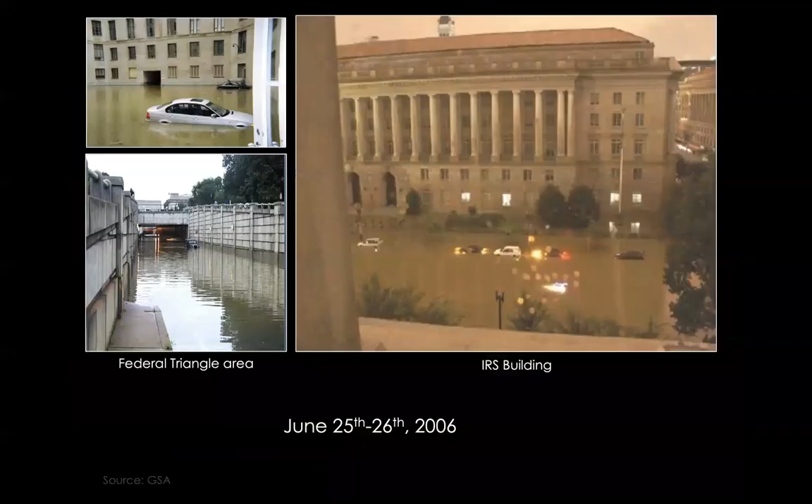The National Mall, one of our most iconic landscapes and public spaces, is threatened by devastating flooding. This reconstruction shows how floodwaters in 2006 inundated Constitution Avenue, the National Archives, Smithsonian museums, and more.

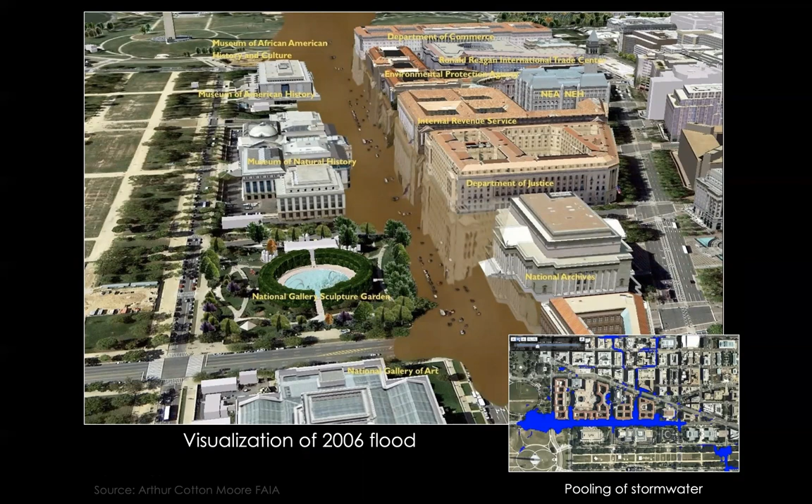This was hardly the first time the mall area had been flooded. Floods did extensive damage in 1889, 1936, 1985, and as recently as July 2019, when a month's worth of rain fell in less than an hour, overwhelming storm sewers, flooding the National Archives' new visitor center and the White House basement.

Flooded walkways around the tidal basin are a regular occurrence. 14 years after the 2006 flood, with a host of studies confirming the threat from agencies like DC Water, the National Park Service, and FEMA, there's still no agreement on what to do.

Recent efforts by an intergovernmental flood response team, the DC Silver Jackets, have been unable to bring the relevant federal and DC entities to agreement on a solution. The biggest impediment, and pretty much everyone agrees on this, is the plethora of entities involved in mall governance. These include the Park Service, Smithsonian, plus DC and federal review agencies. No one entity has the jurisdiction or responsibility, or importantly, the funding, to tackle flooding.

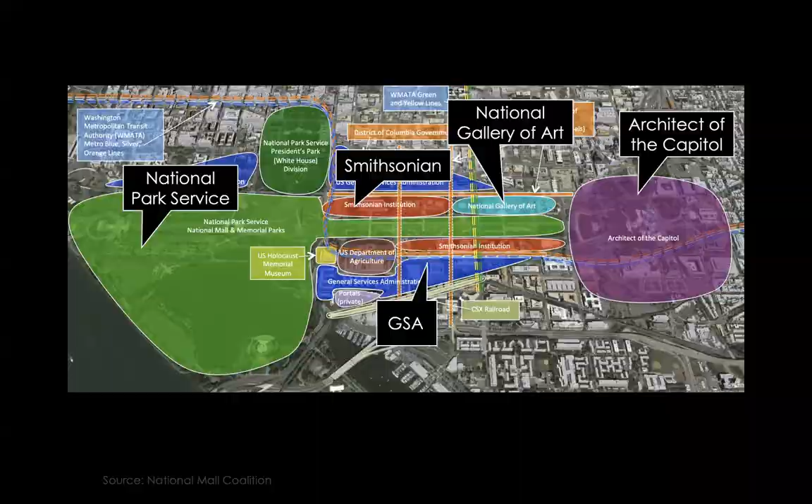We want to show you what we think is an important contribution to solving the stormwater flooding crisis: the National Mall Coalition's National Mall Underground. Architect and Coalition Vice Chair Arthur Moore has been designing the concept since 2013. We've refined it in dozens of meetings with DC and federal agencies and civic groups. Both the Army Corps of Engineers and the Silver Jackets have reviewed it.

What is it? The underground is a multi-purpose stormwater reservoir, mall visitor center, tour bus parking, and geothermal energy facility. The basic box, a large stormwater reservoir, can be constructed beneath the mall's grassy panels between the Smithsonian Castle and the Natural History Museum. The underground can collect 28 to 30 million gallons of floodwater, the volume of a flood like the one in 2006.

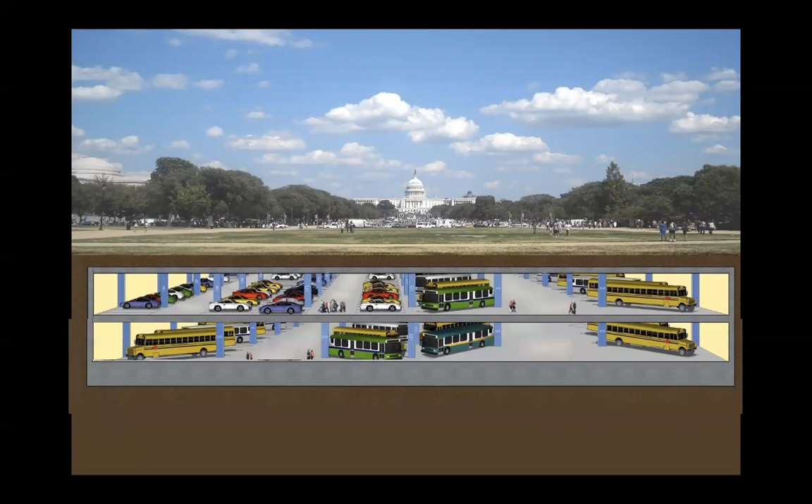When not needed to collect stormwater, the lower floodable level will be a parking garage for tour buses. The upper level, not to be flooded, will contain car and bus parking, plus rest facilities for bus drivers and a mall welcome center with restrooms and food service.

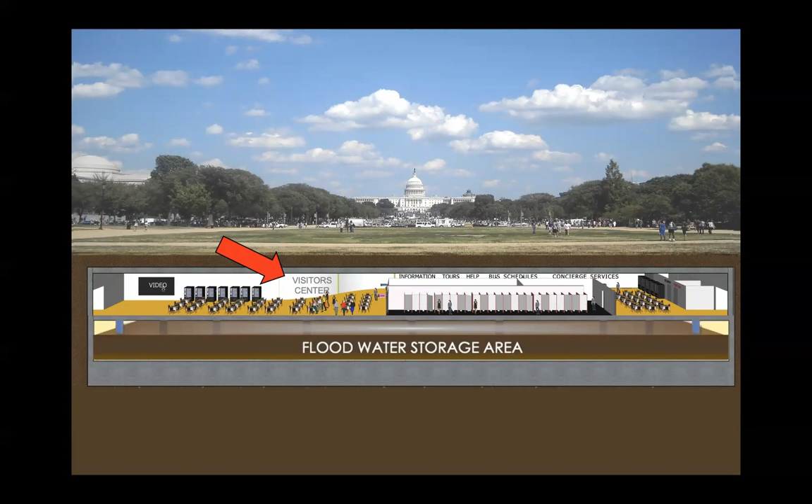At one end, a small cistern can collect rainwater. At the other end, another cistern can hold groundwater pumped from beneath mall area buildings. This water can be used for irrigation of grass, trees, and gardens.

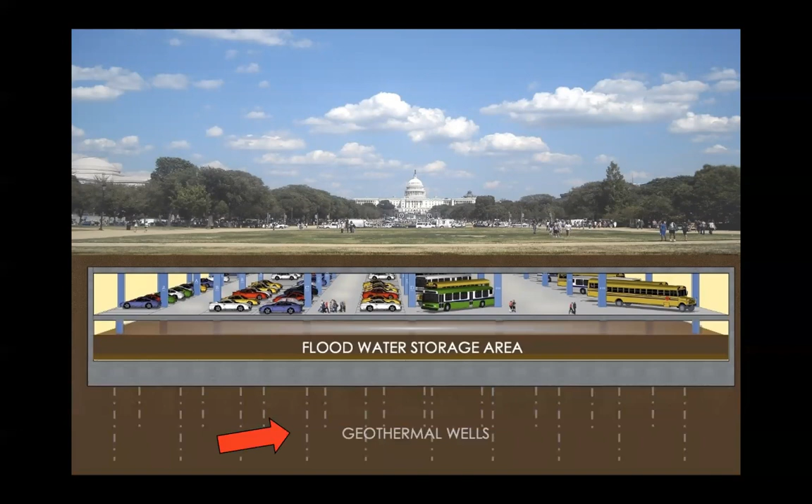Geothermal wells beneath the structure were added to the concept in 2014 at the suggestion of then GSA Administrator Dan Tangherlini. These will provide 3,000 tons of cooling per hour, enough clean energy to power not only one, but several Smithsonian museums and other public buildings.

Vehicles may access the underground via the existing ramp from Independence Avenue to the 12th Street Tunnel, via a ramp between the Arts and Industries Building and the Hirshhorn, or through the 9th Street Tunnel. Cost estimates for the underground range between 260 and 320 million. That's a lot of money, but we have a plan. We'll get to that.

The Beneath the Mall Stormwater Reservoir is not the Coalition's idea. It was one of four solutions found viable in the 2011 Federal Triangle Stormwater Drainage Study. That report, commissioned after the 2006 flood, was a collaboration among 14 federal and district agencies, but the cost of the reservoir, $400 million, was deemed prohibitive.

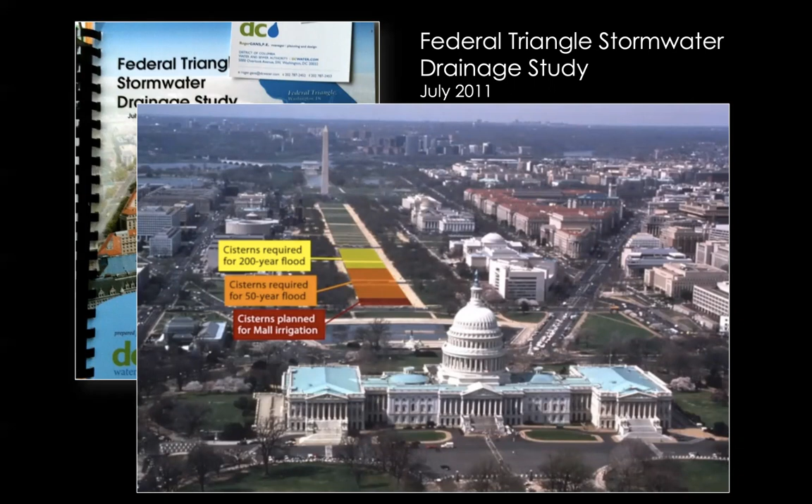The Coalition's idea was to take the empty box beneath the mall that would sit unused most of the time and turn it into an active, visitor-friendly facility that will generate revenue year-round. Intrigued, the DC Council in 2017 passed a unanimous resolution asking the U.S. Army Corps of Engineers to study its feasibility. In September 2018, the Corps found that flood risk from a storm of the intensity that flooded the Federal Triangle area in 2006 could be reduced significantly during a flood event by implementation of the underground. Also, revenue potential from parking fees and water credits may offer self-financing opportunities that attract a public-private partnership.

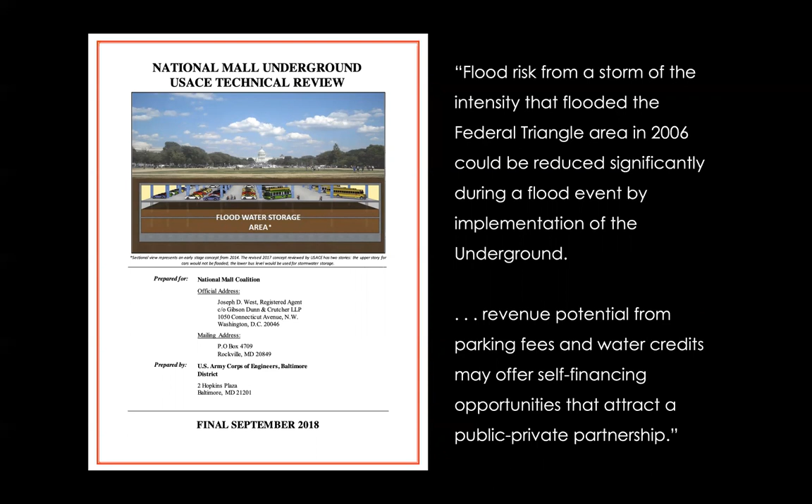Also in September 2018, Arthur Moore and I were invited to present the underground concept to DC and federal agencies and local universities of the DC Silver Jackets team. Clearly, there is interest in the concept among mall stakeholders. However, the Park Service opposes it because it does not conform to its own 2010 National Mall Plan.

Now I'd like to anticipate some questions you may have. First, aren't there alternatives that don't require digging up the mall? Let's start with some basic flood history. It's important to understand that DC has three different types of flooding. These slides come from a 2018 presentation by the National Capital Planning Commission.

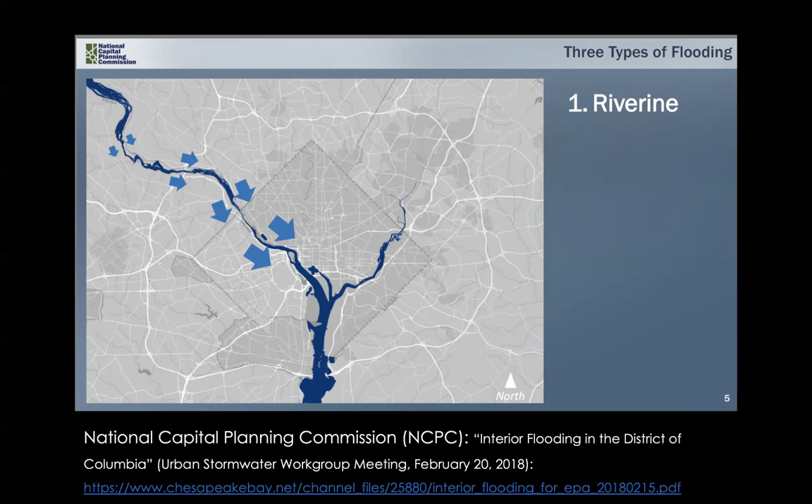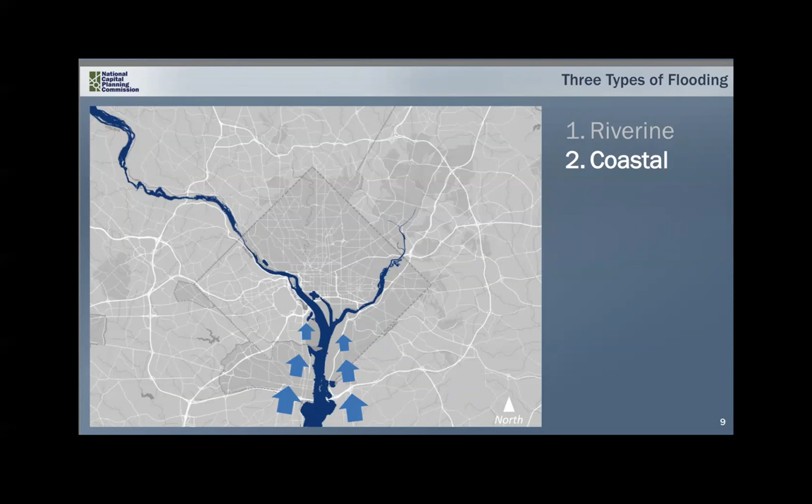Riverine flooding happens during and after heavy rains as the Potomac overflows its banks. It happened in 1889, several times in the 20th century, and is common at Washington Harbor and Georgetown. Coastal flooding, or tidal flooding, happens when tides and storm surges push the Potomac northward. The submerged walkways around the Jefferson Memorial result from tidal flooding.

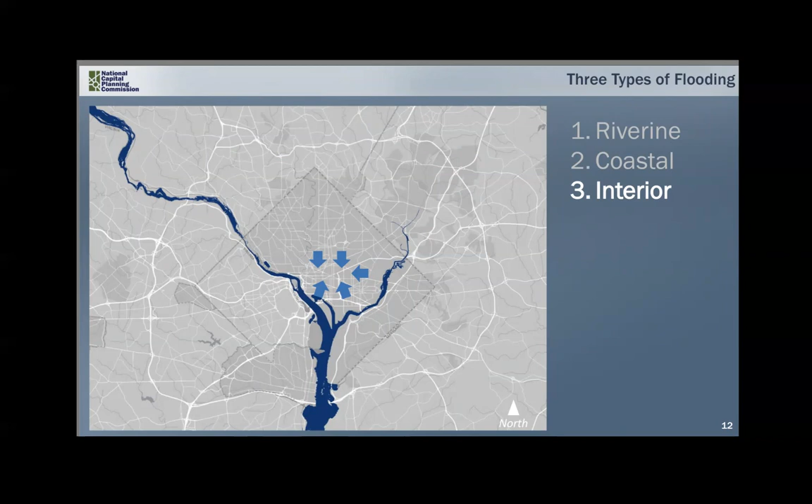Interior flooding has nothing to do with the rivers. It happens when heavy rains overwhelm the storm drains, inundating streets and buildings. This is what happened in 2006, destroying the National Archives' newly opened visitor center, closing museums and government buildings, and causing tens of millions of dollars in damage.

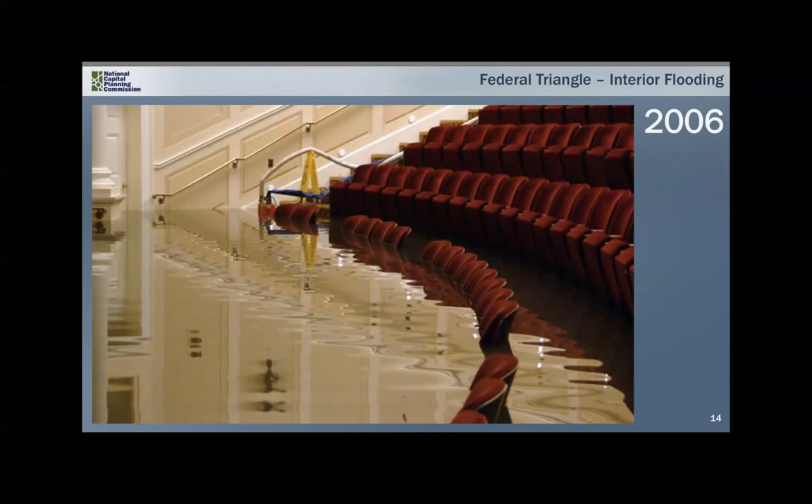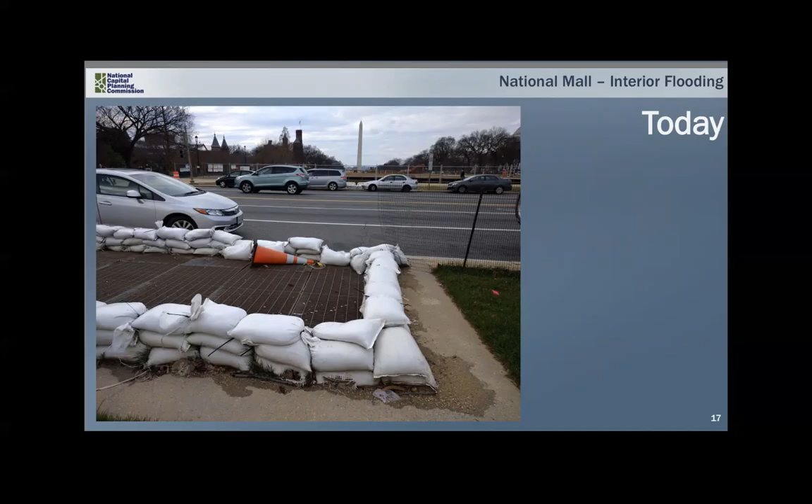Since then, stopgap measures like sandbags have been used to protect underground metro stations. While some corrective actions are being taken to address riverine and tidal flooding, none of these will protect the mall from interior flooding. The 2019 Silver Jackets report on interior flooding in the mall area concluded that of all the potential solutions studied, only two are viable.

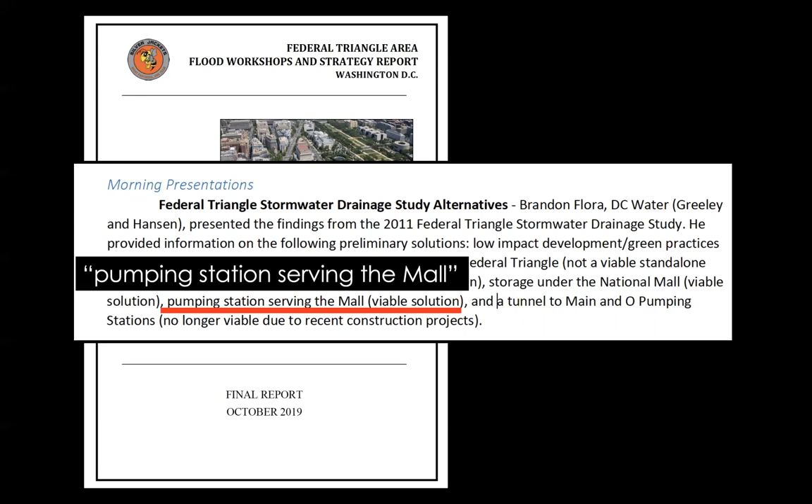One is to build a new pumping station to pump floodwaters into the tidal basin. But what if DC gets heavy rains that cause both interior flooding and riverine flooding? Where would the water be pumped? The only other viable solution, according to the report, is stormwater storage under the mall.

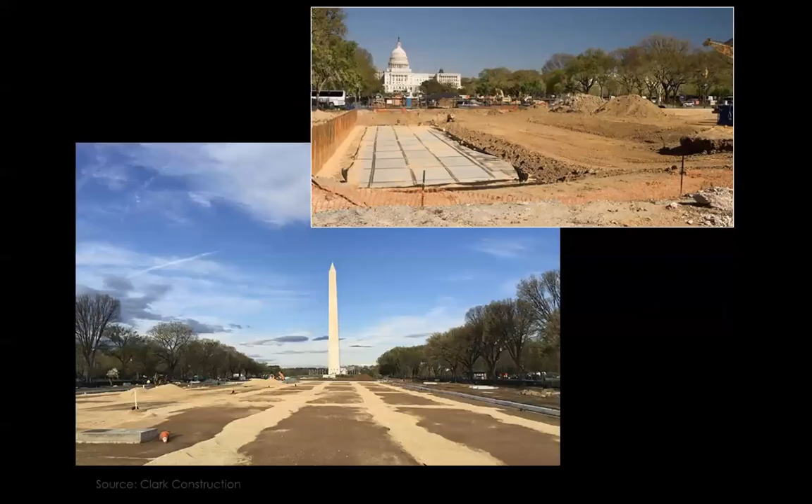Construction will cause inconvenience. It will close off a three-block area between 9th and 12th Street for about two years. But the Park Service's turf grass renewal project also closed off large swaths of the mall for two years, from 2014 to 2016, and visitors seemed to adapt in anticipation of the beautiful carpet of green. We believe visitors also will forgive the underground's short-term effects once they can experience its benefits.

Second, won't the underground increase traffic and congestion? We think not. Tourist destinations around the world, for example at Amsterdam's Museumplein Park, and close to home, Washington's National Cathedral, use underground parking to get cars and buses off the streets while supporting tourism and its economic benefits. The truth is, DC and federal agencies have for years been searching for ways to get buses off city streets.

It's not just traffic congestion, it's also public health. The American Lung Association's 2019 State of the Air report gives DC an F for ozone, associated with high rates of childhood asthma. Buses parked underground will be off the streets with their engines off. The Metropolitan Washington Council of Governments did a study of bus parking in 2015 and concluded that the proposed National Mall Underground would be the most dramatic improvement in bus parking capacity if constructed.

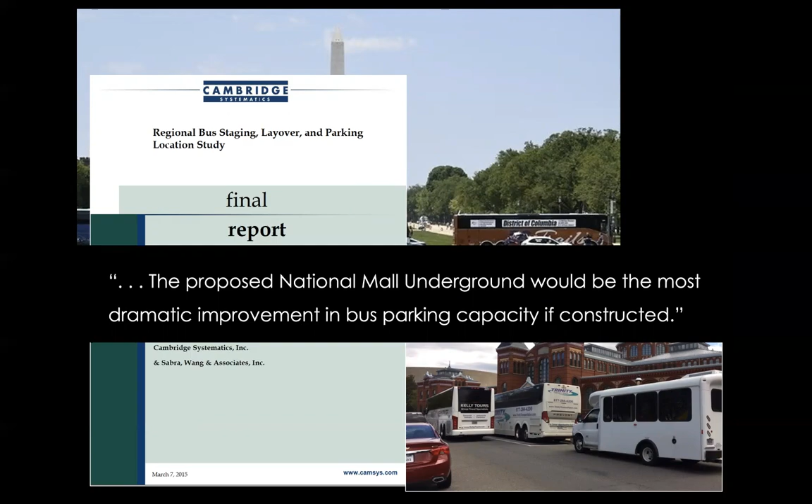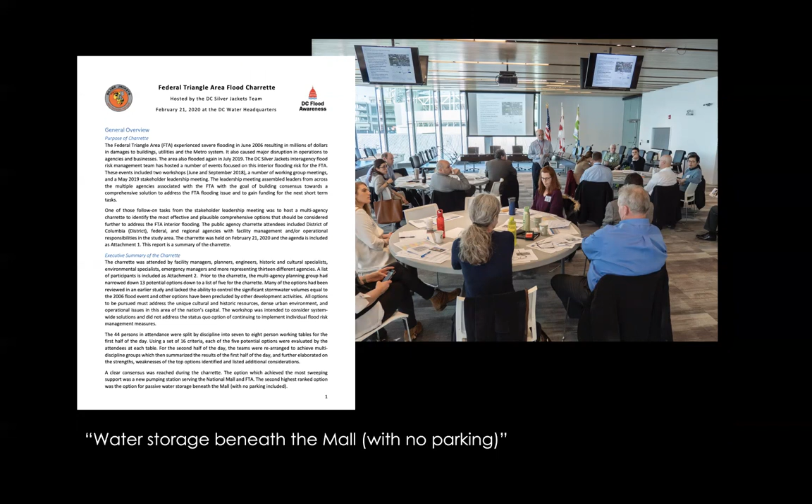As for car parking, the Silver Jackets held another charrette in 2020 and once again endorsed the underground cistern concept. However, they rejected ancillary uses such as parking. The coalition has taken this criticism of the car parking component seriously and in response developed Alternative A. This alternative design includes no car parking and instead provides two levels of bus parking.

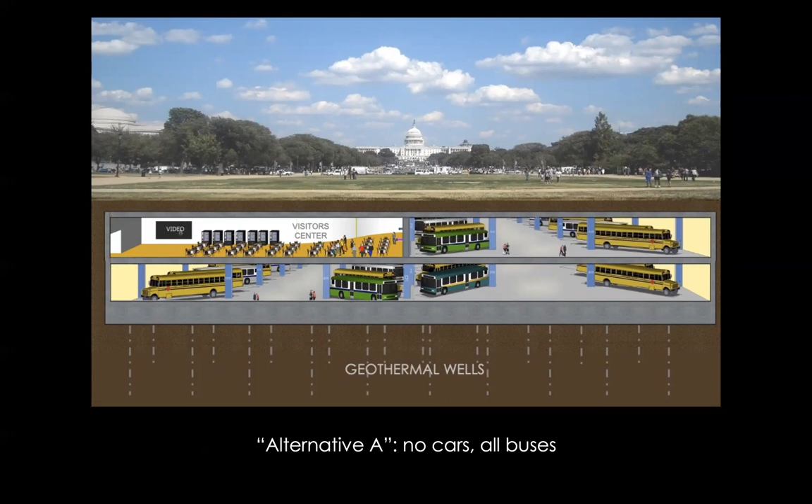Third, who will pay for it? From the beginning, we believed that revenue generated from the underground's various components could provide creative financing opportunities.

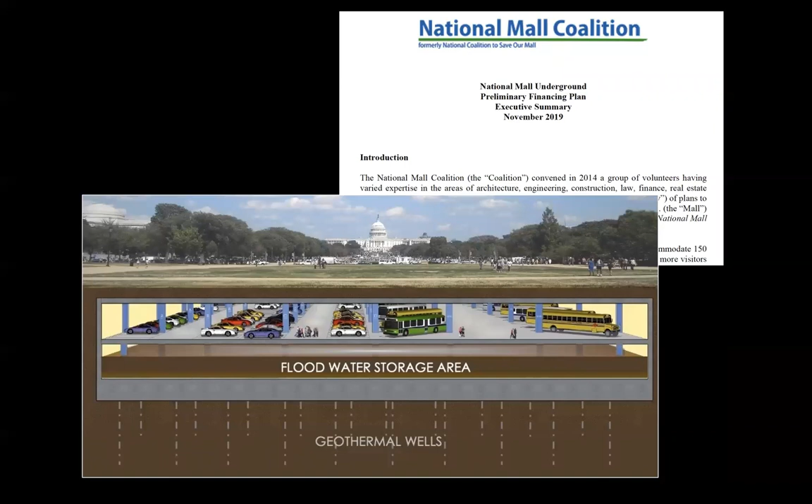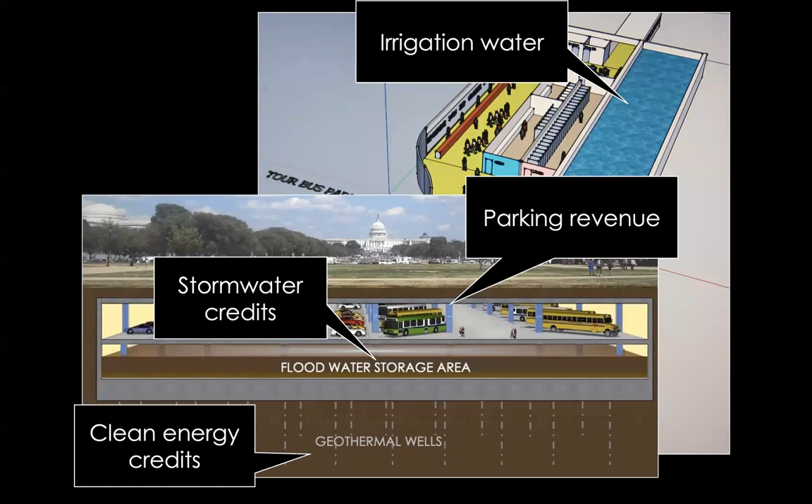So in 2018, we commissioned a financial consultant with strong experience in government projects to develop a financing plan. The consultant concluded that for federal and DC stakeholders, the National Mall Underground can achieve a stormwater mitigation solution at significant cost savings compared to other alternatives identified thus far. Of equal value to federal stakeholders is that the financing plan is expected to make use of existing federal contracting authorization programs to pay for the project over time, avoiding the need for a substantial upfront appropriation. The programs include stormwater credits, clean energy credits, sale of irrigation water, and parking revenue.

Fourth, is the danger really so great? The mall is a product of two visionary plans, the L'Enfant Plan and the McMillan Plan. Unfortunately, one of the unforeseen but disastrous legacies of these historic plans is flooding.

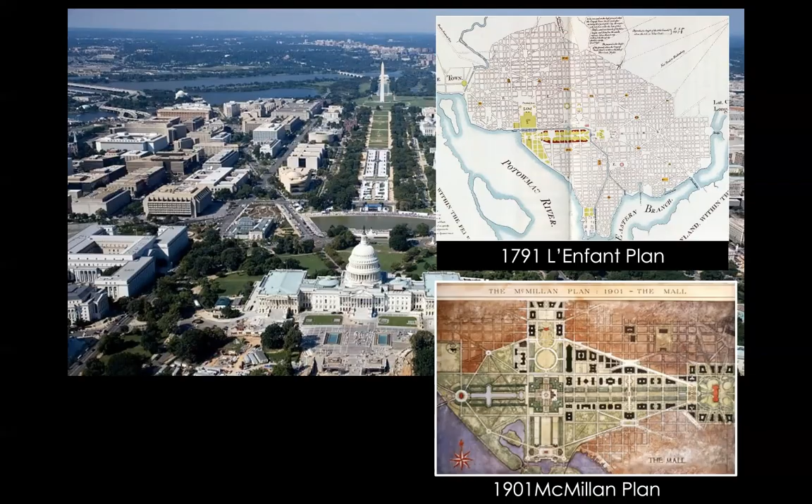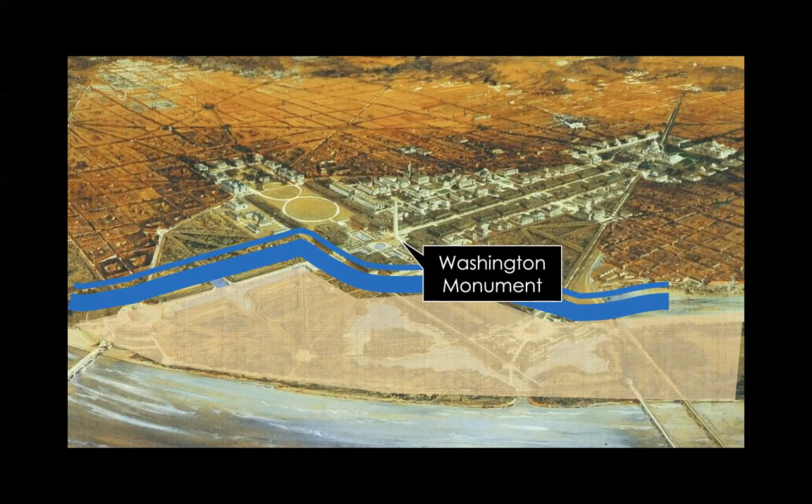L'Enfant situated the low-lying mall along two waterways, the Potomac River and Tiber Creek. By the time the 1901 McMillan Commission came along, Tiber Creek had been paved over to create Constitution Avenue. Also by then, the Army Corps of Engineers had created hundreds of acres of new land with material dredged from the Potomac, thus moving the Potomac shoreline one mile west.

The McMillan Plan used that land to expand the mall, westward to a monument to Lincoln and southward to what became the Jefferson Memorial. In other words, a good half of the mall is located in what used to be Potomac River bottom, and the complex of government buildings we know as the Federal Triangle sits over old Tiber Creek. With the best of intentions, L'Enfant and McMillan tried to tame nature, but now nature is roaring back.

In conclusion, the National Mall Underground provides what mall stewards want but have not been able to agree on: a single, comprehensive solution to the flooding threat to the mall and Federal Triangle area. It also addresses another urgent mall-wide need: clean energy. The underground's 3,000 tons per hour of geothermal energy can provide that sustainable alternative, and not just for one building, but for many.

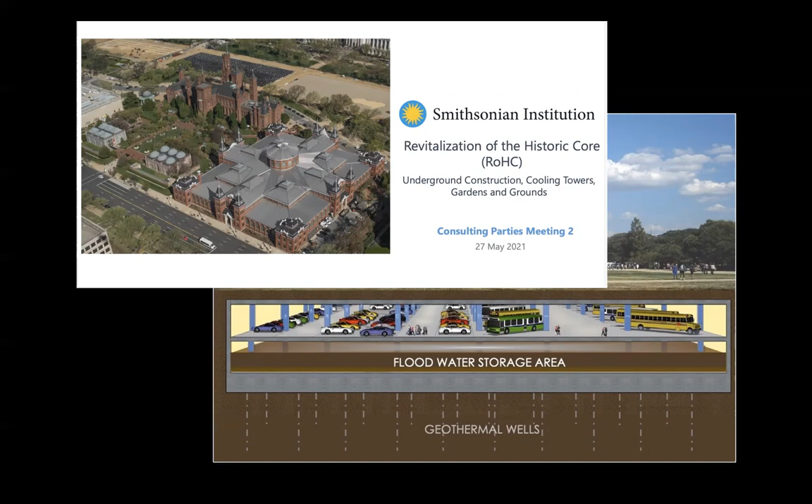With the National Mall Underground multi-purpose facility, the Smithsonian and others could eliminate flood storage and geothermal energy from their planning needs, and in the process, save taxpayers' money and reduce the need for years of construction projects on the mall. Commissioners, the last time our country had a truly comprehensive plan for the mall was 120 years ago.

Now again, we need sites for new museums and memorials, but we also need ways to rise above jurisdiction-based thinking and duplicative building-by-building infrastructure improvements. With the National Mall Underground, the coalition is offering innovative, all-inclusive thinking about the future of the mall. We urge this commission to support further development and construction of the underground.

And in the spirit of the L'Enfant and McMillan Commission, we urge this commission to take up its role as advisor to the President and Congress to initiate a new, comprehensive, and visionary plan for the entire mall in the 21st century. Such a plan can create an optimistic, future-oriented, and lasting legacy for our nation as we celebrate in 2026 the 250th anniversary of our founding.